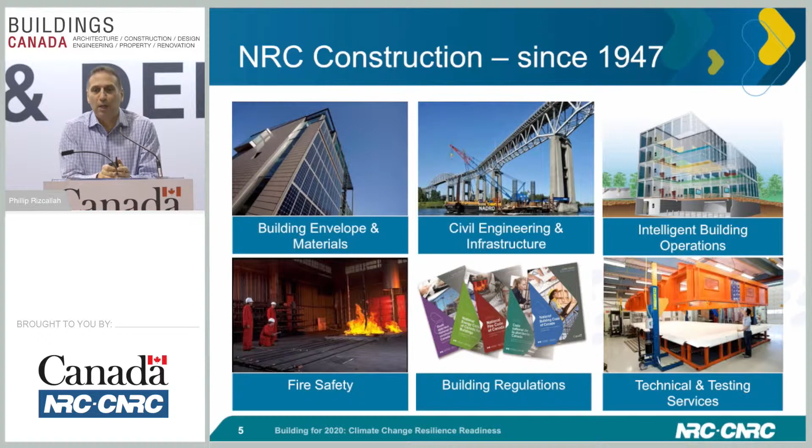So what is the role of the construction codes in Canada? We know that the construction industry is a $130 billion industry in Canada, and the role of the codes within this construction industry is very important. It actually establishes the minimum level that you have to build, construct, or design to that will be acceptable within the country.

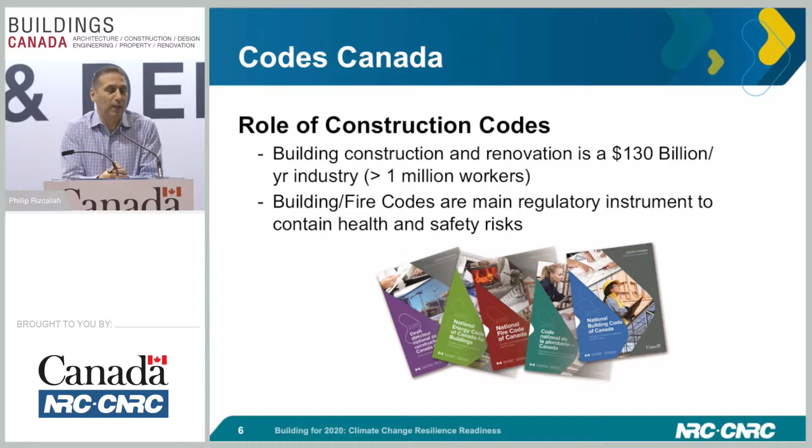How do we actually develop our building codes? The National Research Council itself does not develop the building codes. It's not the staff that sit in the offices that decide, today you're going to be allowed to build this way, and going forward, this is what you have to do.

It's actually a set of committees. We have independent volunteer members that sit on these committees. So we have CCBFC, which is a commission. This is a body of about 35 people representing industry, regulators, and general interest groups.

They essentially decide on what we're going to be putting into our codes. So they'll say, for the next 5 years, because our codes are developed over a 5-year cycle, we want to work on energy and improve energy efficiency in buildings. They'll set that policy, they'll set that decision, and then they send that direction off to the standing committees.

Those are the technical committees that have all the expertise. So Standing Committee on Energy Efficiency in Buildings, for example, EEB, is a committee that looks at updating and improving the National Energy Code. Again, it's a committee of volunteers. National Research Council provides financial support, administrative support, and technical support, both at the committee level as well as at the research level. We will research and provide validation for all the requirements going into the code to make sure that it's sound and will actually work as intended.

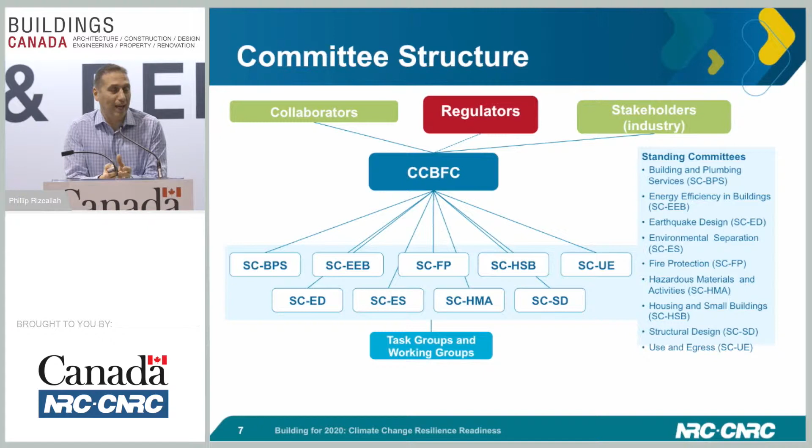The system itself is very open and transparent. It's not a closed system. It's not that only the committee and commission decide what happens within the code development process. Everybody and anybody can get involved in that process. It's open, it's transparent. You can come as an observer, you can put your name down to sit as a committee member.

You can actually comment during consultation, and consultations take place every year on the changes, and everybody who comments, everybody who participates is listened to. So this truly is an open system. Sometimes we hear a lot of comments about why did NRC do this, why is NRC putting this into the code? We put it into the code because the independent body of voluntary committee decided that this was in the best interest for whatever the issue is that we put into the code.

Very complicated, very convoluted slide here, but essentially what it's telling you is that there's ways to participate in this system at the beginning, at the end, in the middle, throughout the whole process. So right at the very beginning, if you're a designer, an industry, a manufacturer, and you have a product or a system that you feel warrants application on a national level, you can come to the National Research Council, or go online and submit a proposal for change.

You say, I have this great system for insulation of buildings, and I would like to have this introduced into the codes. The committees will take that application and consider it, they'll look at it, weigh the pros and cons of that system, debate it for up to 5 years, it could be longer, it could be shorter, and then they'll make a recommendation that this change go into the code.

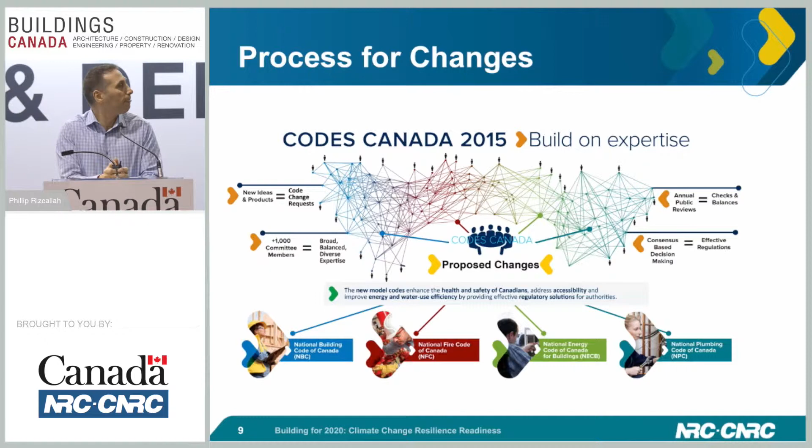So I've already talked about all the partners in the system, and I'll skip the slide right here. So how does climate change play into this?

I just finished telling you that the National Research Council is a research organization, and we also develop building codes and construction codes. Over the next 5 years, NRC has received funding to work on climate change adaptation requirements for the code, and I believe this is going to open up a lot of opportunity for industry, manufacturers, and designers.

In the area of infrastructure, the National Research Council is going to be looking at introducing new codes, guidelines, and tools to deal with heavy rail, bridges, roads, wastewater, and flooding control. So technology in those areas is going to be required. We'll design and come up with solutions, regulations, and guidelines to do this, but the manufacturers have to have the products that come out to meet those demands.

On the infrastructure side, I didn't want to focus very much on it. I'd rather talk a little more on the construction side, on the building construction side, which will be the following slide. This is just an example of what's happening with climate change adaptation.

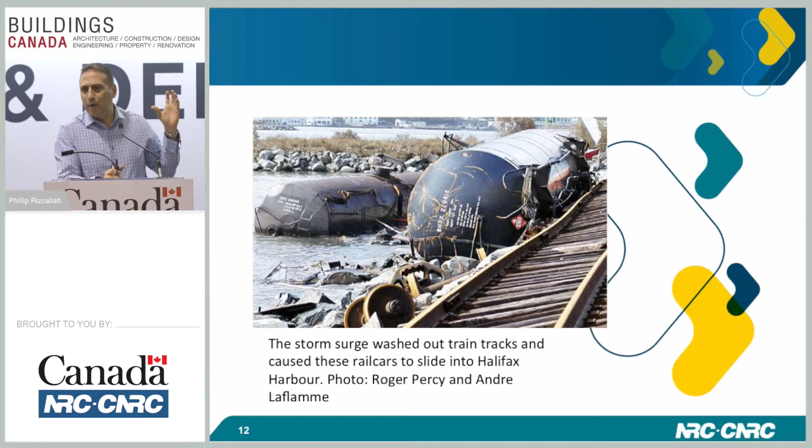This is a tanker rail in Halifax, or in Nova Scotia, that fell off the track because of tidal surge. It eroded the ground, and everything collapsed. This is the type of thing that we're going to be designing to try to avoid in the future.

Designing against it. Some of the opportunities that actually exist on the construction side are numerous. I can't tell you exactly what the opportunities are because we're still in the midst of developing those changes and those technical solutions. But if we're looking at opportunities for both new and existing buildings, we're looking at climate change adaptation measures that will mitigate against snow loads, heavy wind loads, and variations in temperatures.

Permafrost - we have melting permafrost up north, so we have to come up with solutions to guard against that. Wildland fires - we've had a number of wildland fires in the past, and we want to try to mitigate or reduce those. Also fenestration, electrical, and basement flooding issues.

Here's the rest of the slides, they don't have many words on them, just a lot of pictures. But if you look at snow loads, for example, historically the way codes are developed is by looking at historical climate data - what's happened in the last 5, 10, 15, 20, or 30 years with regards to snow loads. We take that data from the past 50 years, say, and use it to determine how we'll design our roofs, our walls, anything that's structurally loaded. Unfortunately, that doesn't work going forward.

We know that the climate is changing. We know there's going to be differences in the amount of snowfall and rainfall we get going forward. So we're actually looking at working with various organizations like Environment Canada, for example, to determine what the forecasted 50, 75, 100-year predictions will be for snow loads and wind loads. We're going to take that data, and that's what we'll use when we come back with new requirements for how you build your roofs and what kind of materials you need to use.

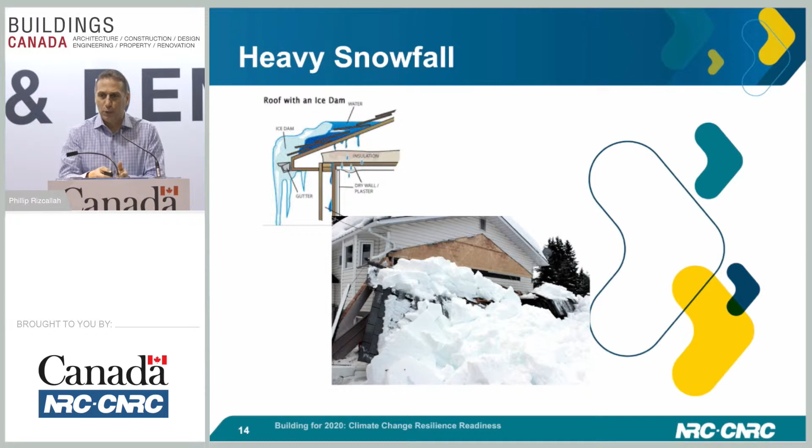You look at extreme events like wildfires. The latest one we had was in Fort Mac, billions of dollars in loss. They lost almost an entire community because of that. And that has to do with climate change.

Rightly or wrongly, if you have drought conditions and a lot of lightning, you're going to have fire. And as we build communities closer to wildland, you're going to lose communities because of this. So we're coming up with solutions. How do we build in communities? We're not here to change climate change, that's not the mission. The mission is how do we build knowing what's happening as we go forward.

Can we come up with products that are more fire resistant? Roofing materials that are fire resistant? Building envelope material that's more fire resistant? Can we put sprinklers in these buildings? Are there new technologies or methods we can introduce that will reduce the impact of these fires that actually happen? These are opportunities for industry.

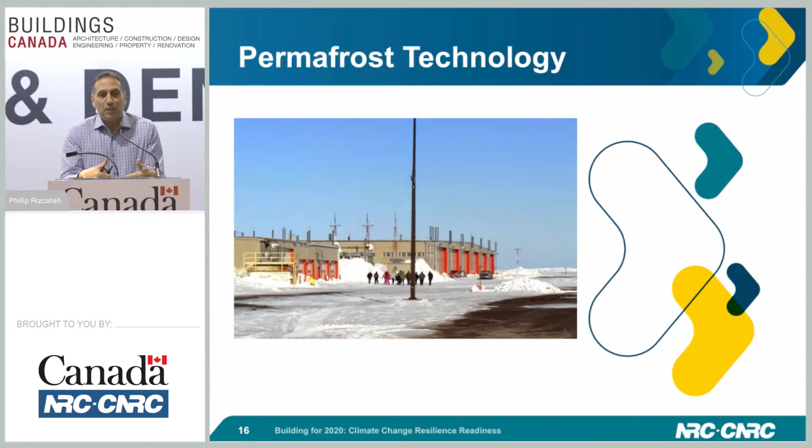Permafrost Technology. We know that communities up north that build on permafrost are running into a lot of problems. Problems like this, where the permafrost begins to melt in certain areas and the building begins to settle unevenly. We have to come up with solutions and technologies that allow us to build in these communities where there is permafrost and not suffer from situations like this.

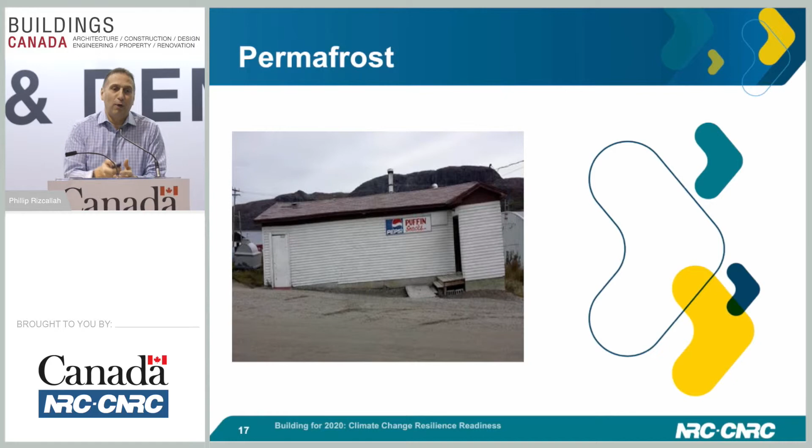So NRC is working with various standard organizations and developing thermosiphon standards, for example, where you can bring in cold air into the ground and keep that ground frozen from the cold air above to keep situations like this from happening. But there's other technology that can be used, and that's another opportunity for industry to jump on. We know it's happening, you might as well jump on it and figure out if you can come up with a solution that we can introduce either into a standard, a code, or a guide that people can use.

Flooding, this is Calgary. We know this happened a few years ago. There's technologies we can use to look at coastal flooding, river flooding, or inland flooding. Just off the top of my head, if you wanted to look at flooding, you can look at backflow preventers, double check valves entering into a building, sump pumps, emergency sump pumps. You could look at furnaces that don't get destroyed when submerged in water. People are designing these. So if you want to get into a market and a niche that we believe will be beneficial, this is an opportunity for you.

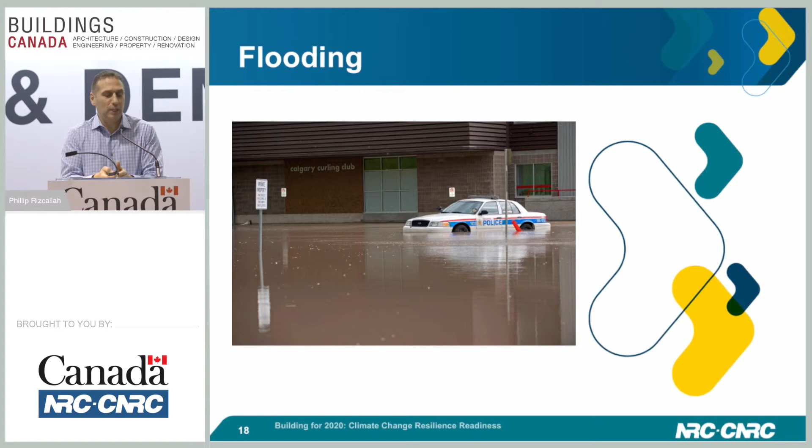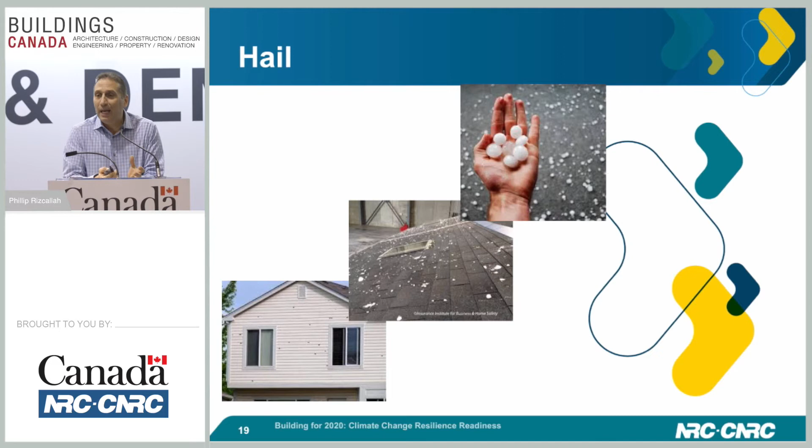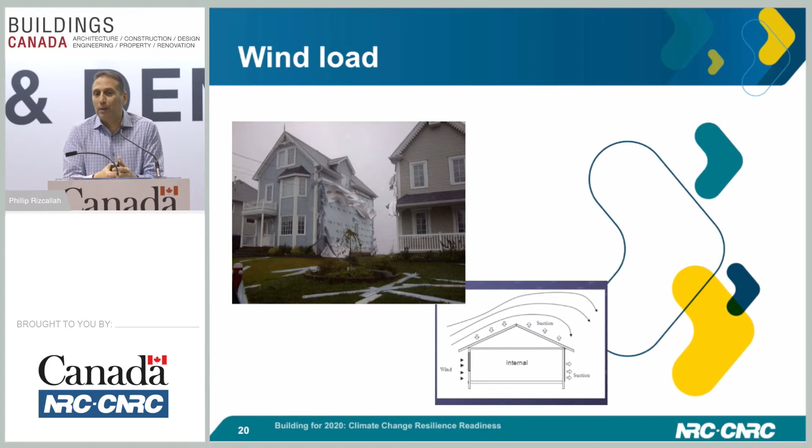Hail, again these are not mothballs, they're actually hail balls. They're causing a lot of damage on roofs, buildings, and windows. You can come up with products that won't get as damaged as the typical products we're using today. That may be an advantage to some industry groups. Wind load, we're looking at different measurements for wind, so maybe the application, the way you install siding on buildings, or the type of material you use will have to change or adapt to these higher wind loads. Same thing with fenestration.

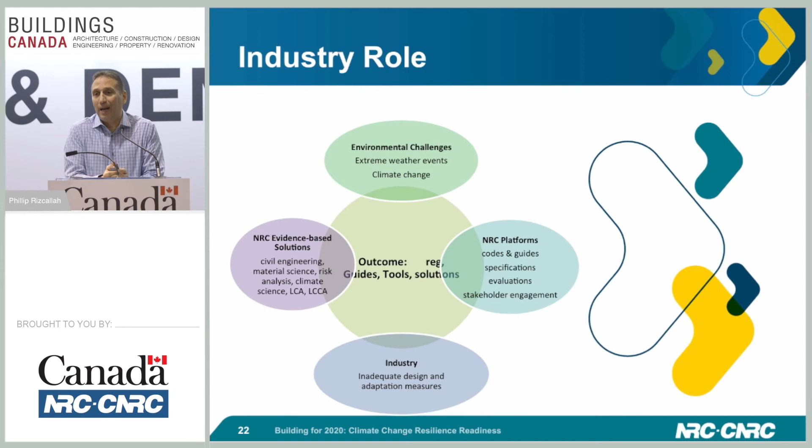I'm ending the presentation in a couple minutes, but I wanted to end by saying that the process itself involves a lot of groups. You have the regulators on one side that enforce and tell you what to do. You have the National Research Council that develops requirements for what we want builders, designers, manufacturers to do going forward. But what's critical is the industry itself has to be there. We can tell you to do X, Y, Z, but if industry is not ready to do X, Y, Z, that's all it is, a book telling you to do X, Y, Z. So you really need to be working with us, be aware of what's happening on our end so that you're prepared to deliver on the products that I think we're going to have to deliver on in the next 4 to 5 years. Okay, that's it for my presentation.